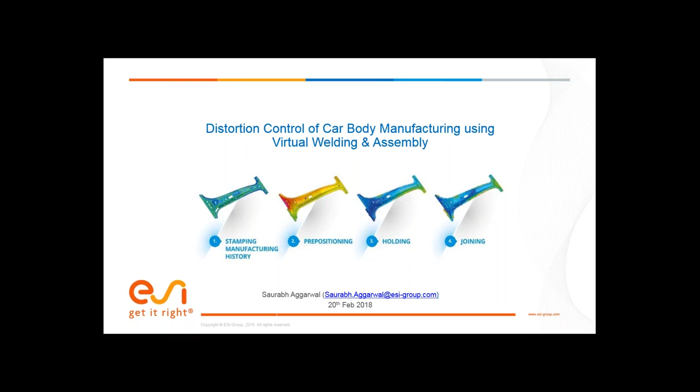So just to present you the brief outline, we will be talking very briefly about the key automotive trends and the challenges for the body shop, where the car body is manufactured by welding and assembly, and how we can accurately predict the distortions in the welded assemblies. But predicting the distortions is not the only objective; the objective is how to control the distortions, and we will demonstrate with a few industrial examples. And then at the end of the webinar, there will be a live demo to show you the workflow. So let's start with the automotive trends and key challenges for body shops.

So I hope you all will agree with what I am going to say, because these are the general trends. As you know, due to global warming, the automotive industry is forced to follow strict emission norms. To follow these emission norms, weight reduction and electrification are the key levers for achieving CO2 emission targets. And these are the main levers which automotive OEMs and tier suppliers are adopting. And along with the emission norms, the requirement of safety is also increasing day by day.

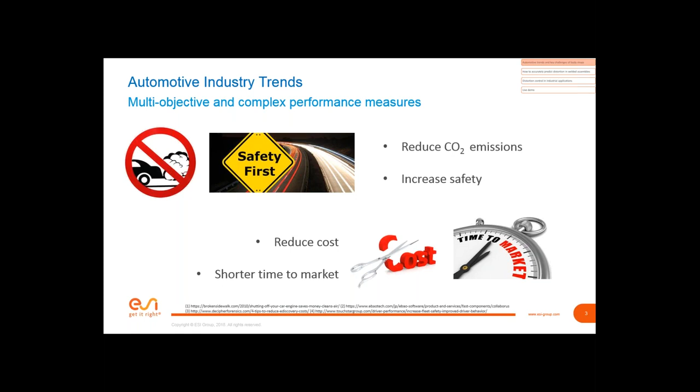So let's discuss a few challenges and the requirements for the automotive industry and how they can overcome these challenges. So we say back to the basics: maybe the vehicles in the future are electric or not, we still require basic parts such as wheels, seats, chassis and bodies. And especially, today's topic is car body manufacturing, so it's body in white.

So the design cycle of the car platform is reduced from several years to months. That means one needs to save on building physical assemblies and do only effective things, and also most efficiently. So we need to ensure successful upfront verification and validation to avoid costly downstream problems. That means at the design stage, we need to include the manufacturing effects or defects so that we avoid them or control them at the production site. So this is really one of the aims of the industry.

And as I mentioned, weight reduction is one of the levers for emission reduction. So advanced steels offer the best weight reduction to saving ratio for automotive parts, but often they possess more springback and less formability, which leads to their manufacturing challenges.

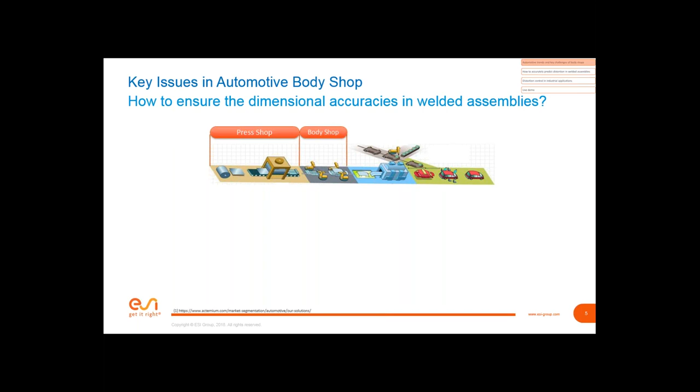So the end goal of any body shop engineer is to manufacture the stamped welded assemblies within the right tolerances to ensure dimensional accuracy. But often they encounter dimensional inaccuracies for two main reasons. One is the mechanical load effects of the assembly, another is the heat effects of the joining process.

And the body shop engineers have to deal with a lot of challenges, like multi-materials that don't have the same thermal and mechanical behavior. They have to deal with stamped components which do not fit the CAD nominal shape, and they have no control over the stamped shapes because they come directly from the press shop.

And they also have to deal with unexpected gaps between deformed components and parts. And, as we mentioned, the heat effects of welding because of thermal expansion and contraction during joining. So these are really the key day-to-day life of a body shop engineer.

So in order to avoid problems, the body shop engineers need to tweak the production process multiple times before the distortions and dimensional inaccuracies are within the tolerance, within the specifications.

So the main objectives for body shop engineers, maybe I'll point them out. They want to optimize the positioning and holding system as fast as possible in order to reach the requirements. Optimized weld positions and sequences.

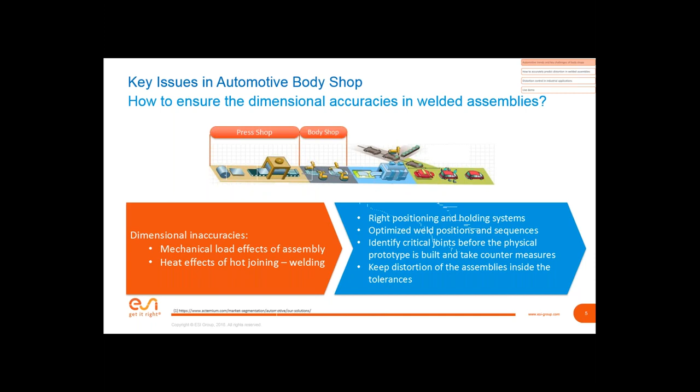But before we move on, just to show you a typical issue in the automotive body. You will agree that these issues are very difficult to predict at the design stage when no tools are built. So this is a prototype part, a cowl plenum assembly in body in white. As you can see here, the reference positioning system is planned during the design stage when there are no tools. But due to the stamped deformed parts, there are often interferences between the parts and the RPS system.

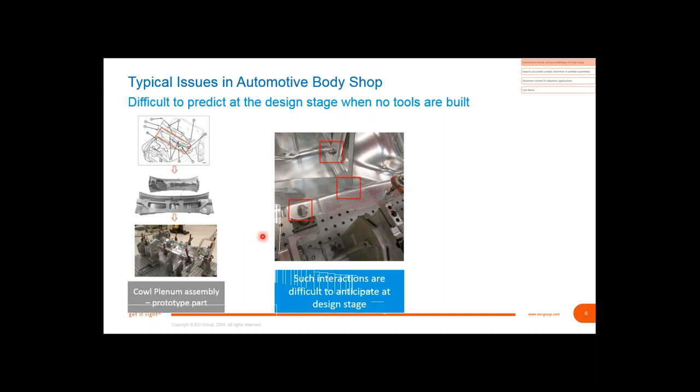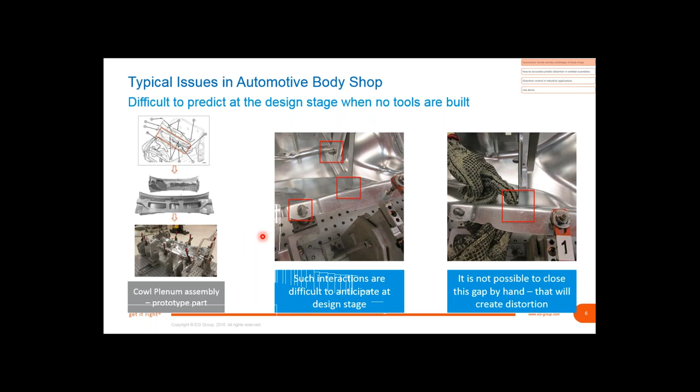So here in this image, you see that such interactions are difficult to anticipate at the design stage. That means body shop engineers have to take care to avoid these things. Moreover, during the assembly there are large gaps, and it's not possible to close such large gaps by hand. Closing such gaps in the body shop will then lead to distortions, which you will see in the coming slides later in the presentation.

So let's now talk about how we can accurately predict the distortion in welding assembly with the simulation software which we have, ESI virtual welding and assembly solution. So just to give you the overall view of the different steps which are taken, that's the main goal of this slide. To fulfill the objective of body shop engineers, we have developed a dedicated solution for distortion control for car body manufacturing.

It's an easy to use assembly simulation software that covers the complete manufacturing chain, starting from stamping, pre-positioning, holding or gap closing, and finally welding and joining, and to support performance analysis. It helps process engineers control and validate distortions and also product performance by taking into account the manufacturing effects right upfront at the design stage.

As you can see, during this complete chaining simulation, as the model changes, we need to transport key data from one simulation model to another, mapping results from stamping to pre-positioning to holding and finally to joining. To reduce this chained process, we have developed a dedicated tool which is already implemented in the software. In the next slides, we will explain a little bit more about the solution and its application.

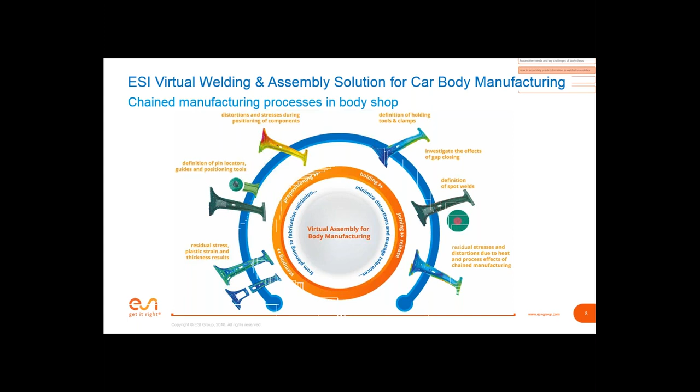Here we would like to present a complete end-to-end simulation chain for complete manufacturing for a B-pillar case, an important structural component of body in white. The stamping simulations were performed with the ESI solution PAM-STAMP, and the key results are plastic strains, stresses, and variable thickness.

To make it clear, there are two ways you can use the welding and assembly software. One, you can do the stamping simulation if there are no tools existing, or you can already take the deformed components coming from the press shop, and that can be your starting point. This will be presented later in the presentation.

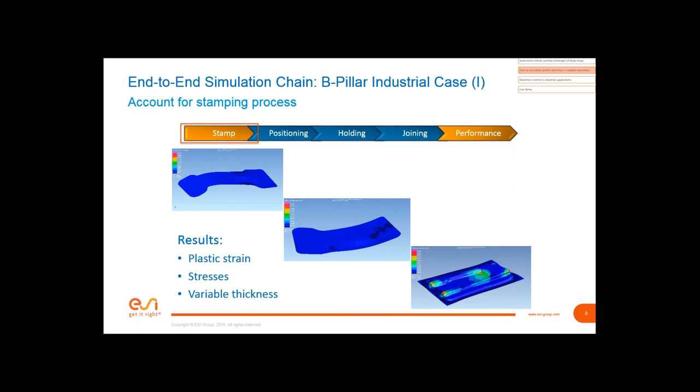In the pre-positioning or positioning stage, starting with the stamped deformed shapes, the parts are positioned in the RPS system, which is a reference point system. We have developed a complete workflow to help the end user set up the complete model by defining different locators, guides, positioning tools or support structure, and contact management to simulate the pre-positioning. The user also has options to choose from various predefined positioning tools, which you'll see a few of during the demo, so I won't show them here.

It's also possible to automatically import clamps and locator tools from user defined files, because most of the OEMs we work with have their own standardized way of storing or creating the reference point system, so automatic import of these RPS systems is possible. Here you can see in the RPS system, the parts fall under gravity, and we can simulate the displacement and residual stresses from just the positioning stage.

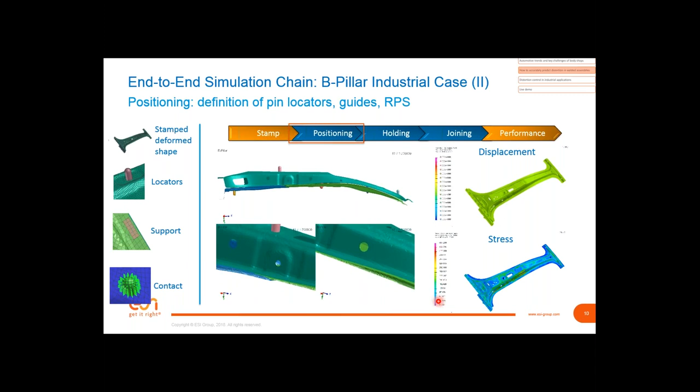Once the parts are positioned in the RPS system, the components are held together to reduce or close the gap. The user can define different holding and clamping tools, so the gaps are properly closed before any joining operation.

Based upon the sequence for various closing or clamping tools, you can define the sequence as per your requirement, and mostly the clamps are piloted by force and displacement criteria. Here again the user gets the possibility to simulate displacement and stresses. If you look closely, the different holding tools close the gap step by step, and we get the displacement and final stresses.

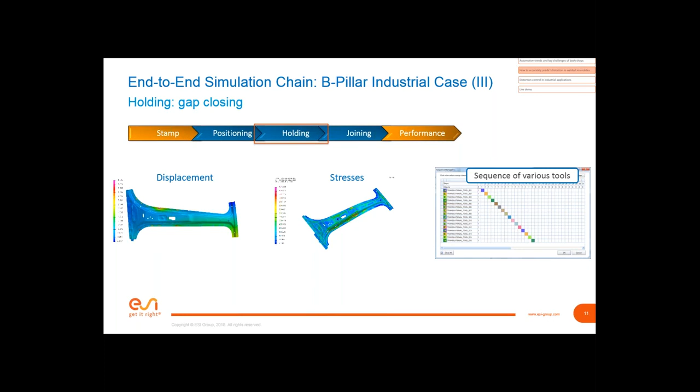Moving further, once the parts are positioned in the RPS and held, it's time to do the joining operation. The user can define the welding sequence. During this computation, the components are connected, and the user has access to the distortions and stresses resulting from the complete process. It's not only about the joining, it's the complete process, taking care of all manufacturing effects right from stamping, pre-positioning, holding, and joining. Here you also have the possibility to define the weld sequence based upon your requirements.

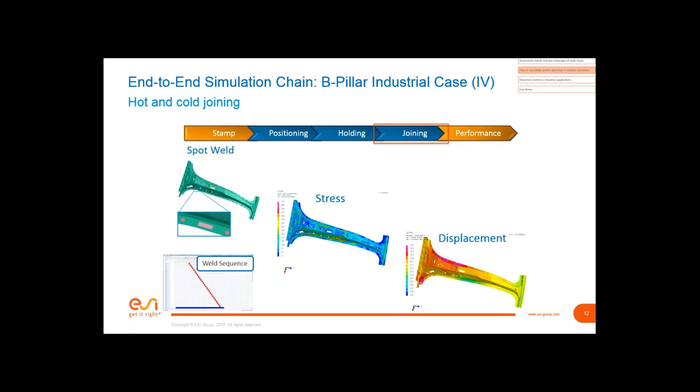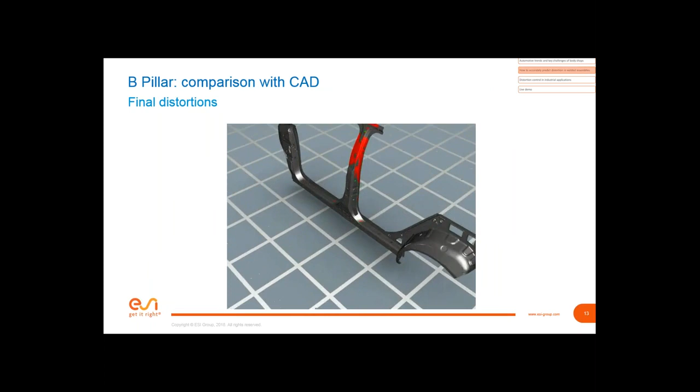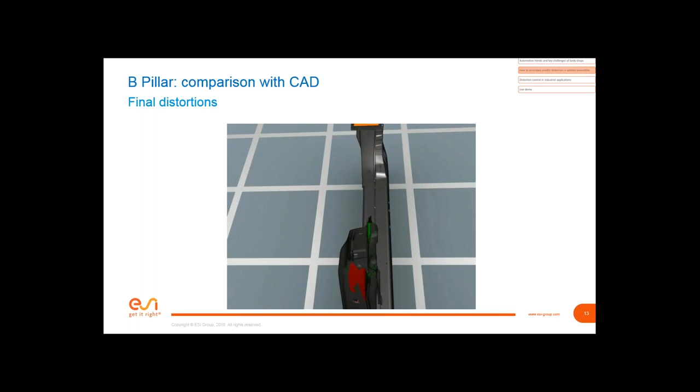Once you have all the information, you have the possibility to compare your final assembly with the nominal CAD and visualize the distortions in the ESI environment. Here you can see the red color, which shows the inaccuracies in the system, and based upon such visualizations, you can make corrective decisions.

Moving further, coming back to the problem we stated in the cowl plenum, where the real deformed stamp components were given to the body shop, the body shop has to find out what the issues are or which are the critical joints. You'll see this in the next slide.

In this particular case, the real deformed stamp components were scanned with white light scan as manufactured by the press shop, meaning the white light scans provide realistic gaps including the stamping manufacturing history.

So the body shop has to ensure the tolerances of the final assembly. That means from the STL file or the scanned file, we created the meshes, the working surfaces of the positioning system. They were extracted from the CAD files.

Here you can see the holding stage, it's a complete RPS system. What is very important to say is that the assembly simulation, or welding assembly simulation, is performed on the deformed geometry, not on the nominal CAD geometry. It's really the stamp deformed geometry, which is very important. So of course we have all these stages from stamping to pre-positioning, holding, joining, and releasing.

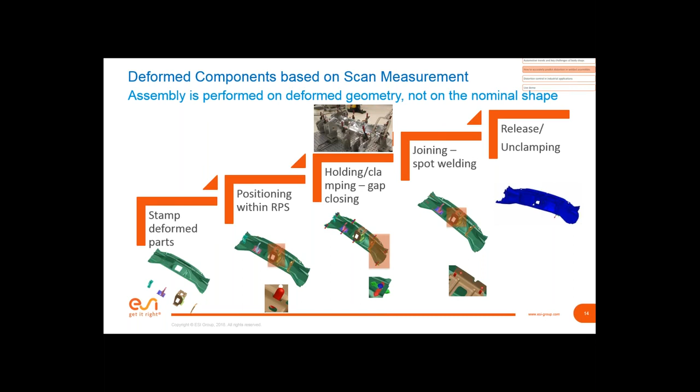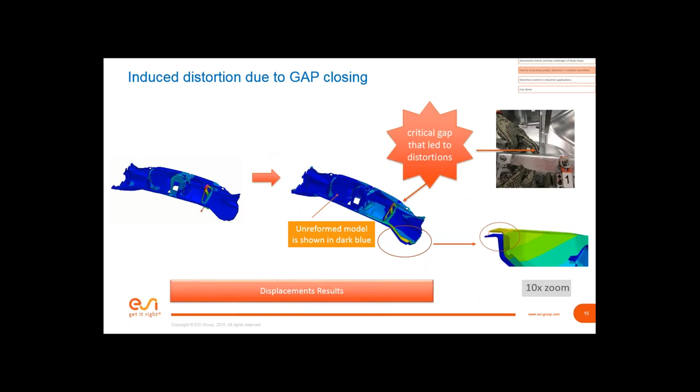Now, of course, it's very good to say that we can predict the distortions, but the final aim, as we mentioned before, is really to control these distortions so that the assemblies can fit within the required specified tolerances. In the coming slide, we will demonstrate a few applications, not going so much into detail, but just to give you the overview of how one can control distortions using virtual assembly and welding simulation.

So here we show one example of a typical door case. It's also a body-in-white structural part, where we will demonstrate how the pre-bending of the part is useful to reduce the final distortions.

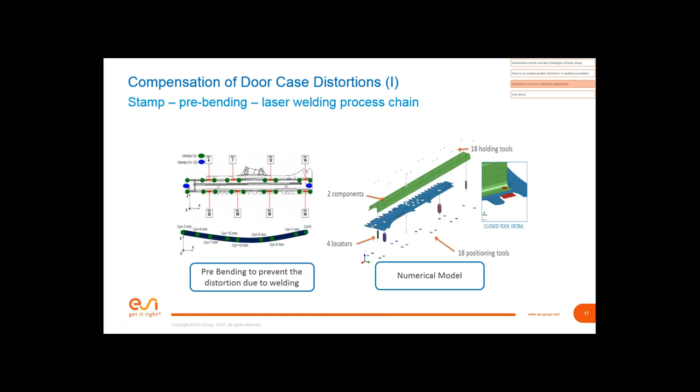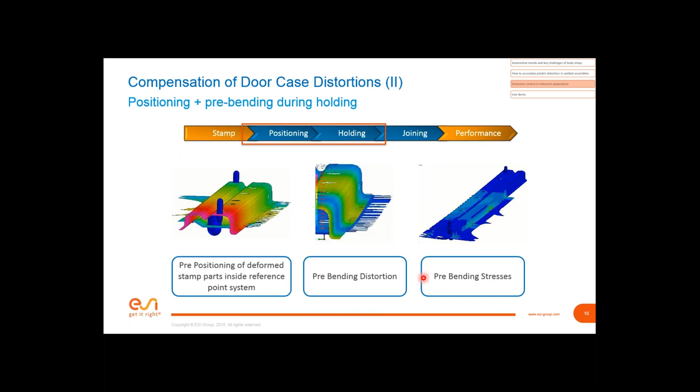Here again, we stamp the parts, and then during the holding stage, we pre-bend intentionally the part by 7 millimeters. If you see in this particular case, the part is pre-bent, and one can compute the pre-bending stresses to ensure that they are within the limit, and you will see what was the reason to pre-bend the part.

So it's mainly the compensation based upon the pre-bending. During the holding stage, as I mentioned, we pre-bend the part minus 7 mm, and due to the heat effects of the laser welding, the parts were distorted plus 6 mm. But as we can see, in the end, the final geometry was fitting the nominal geometry, more or less matching the original or required CAD.

So what is the message for this particular case? With such simulation tools, we are able to numerically know the amount of pre-deformation required in order to prevent the distortions due to stamping and welding processes, directly at the design stage, when no physical prototypes exist. So this is really one of the ways to compensate the geometry based upon pre-bending.

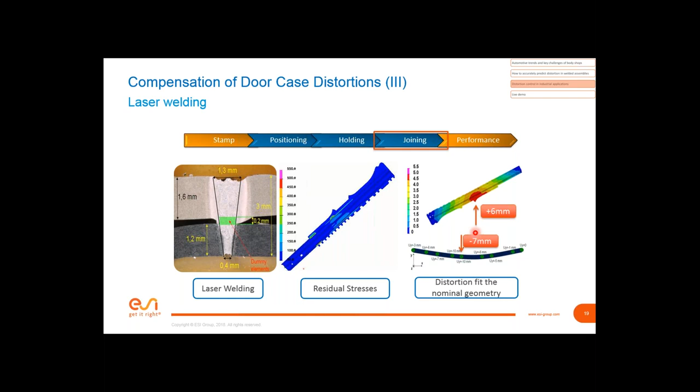Welding distortions can also be controlled by changing the weld sequence, and we have a dedicated tool for that, the weld sequence optimization. Here the user defines the original or initial weld sequence, and in the workflow, the user can also define constraints.

And due to the complexity of the problem, we have developed a genetic algorithm based optimization for minimizing the distortions by weld sequence optimization.

So finally, what we see is we get the weld sequence which will lead to minimum distortion. In this particular example, we were able to reduce distortion by 50% compared to the baseline, and 25% improvement compared to the worst case. So it's really a good tool for controlling distortions by optimizing the weld sequence.

So all these things you can do before doing any real assembly process. You have very good knowledge when you are doing the final or real prototyping, real production, so that you don't make any mistakes, and you are sure that the assembly will fit the required tolerances.

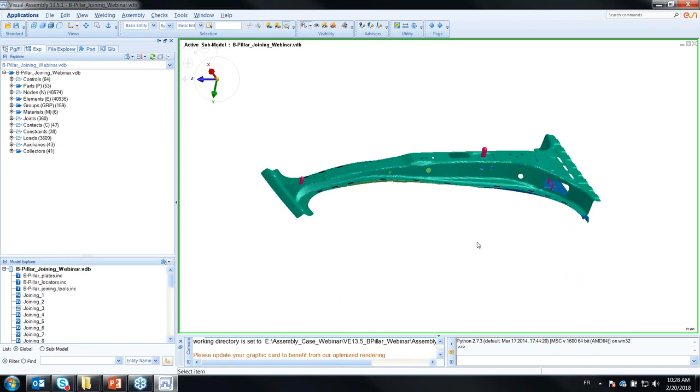So the goal of this demo is just to demonstrate the overall workflow. I will not go so much into detail about how to set up the model, but just show the overall steps which are required. So here is our visual environment, which is the key platform for all our software from ESI, and in this case particularly visual welding and assembly.

As you can imagine, the simulation is performed in 3 different stages: pre-positioning, holding, and joining. We have dedicated advisors to help you set up the complete model. I will not go into much detail about pre-positioning and holding. The most important thing is to show you the overall workflow, and I think the best way is to go into this advisor.

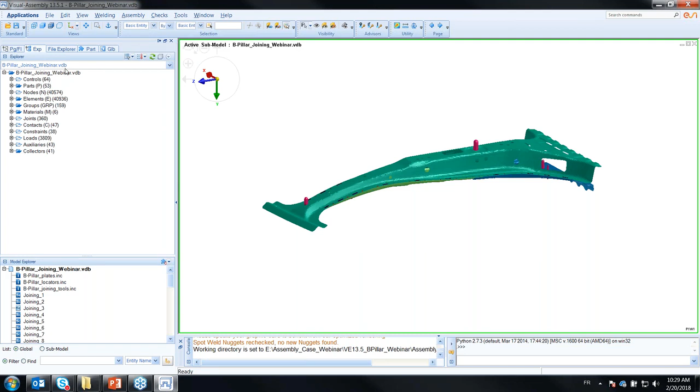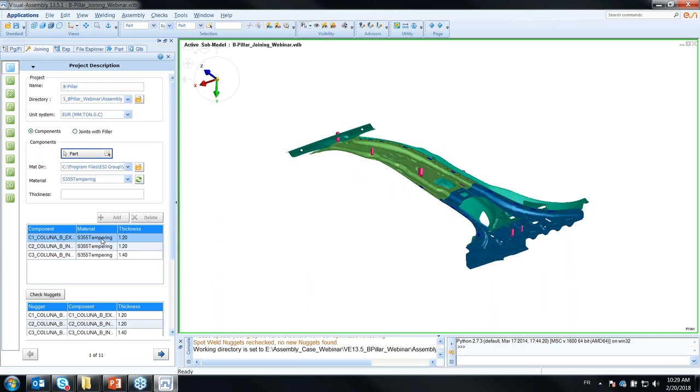I have to close this thing. Okay, so here we have 3 parts, or 3 components, to make the assembly: the external component and 2 internal components, and the material is tempered steel S355Tempering.

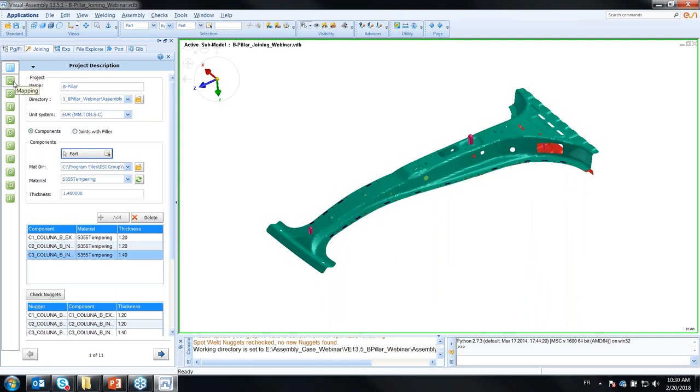So the first stage is to create the RPS system. So how do we create it? You have different locators and positioning tools.

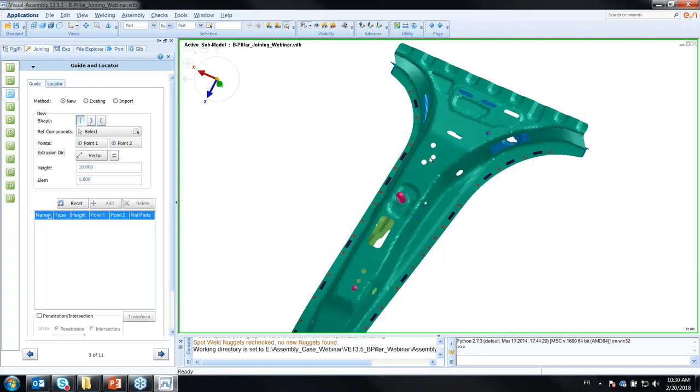I will just quickly create one simple locator to demonstrate that it's very easy to create. You select the reference component, you select the base point, center of, let's say, this particular one, and then you define the axis.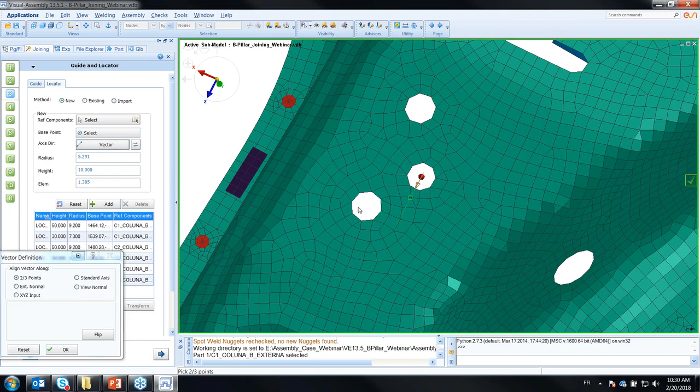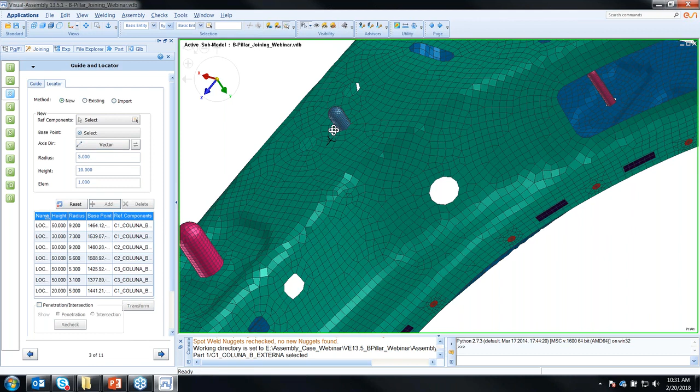Maybe in this particular case we can say standard y-axis, let's say 5, height is 20, element size 1.2. So it has created one locator. It's very easy to create such an RPS system.

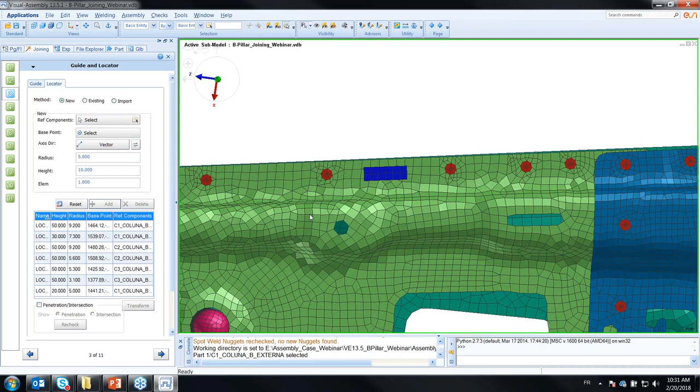As I also mentioned, there is a possibility for automatic import, mainly from Excel files, and the same applies to the positioning tool. You can create the positioning tools in the similar way as we have created the locators.

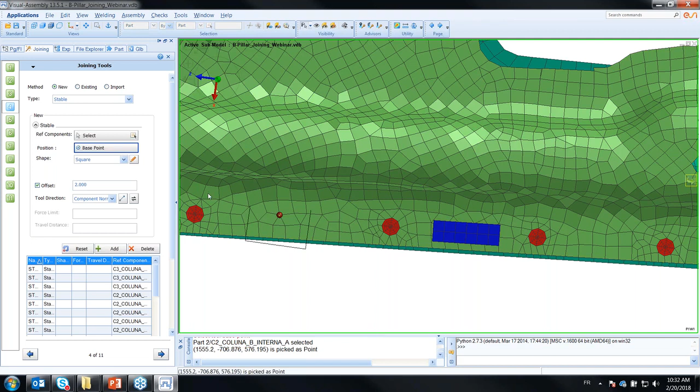So what is important to show is you have different shapes which you can choose, as you see, you have circle. Maybe I'll create a few of them just to demonstrate. Select this - here you can see the shapes, they are changing.

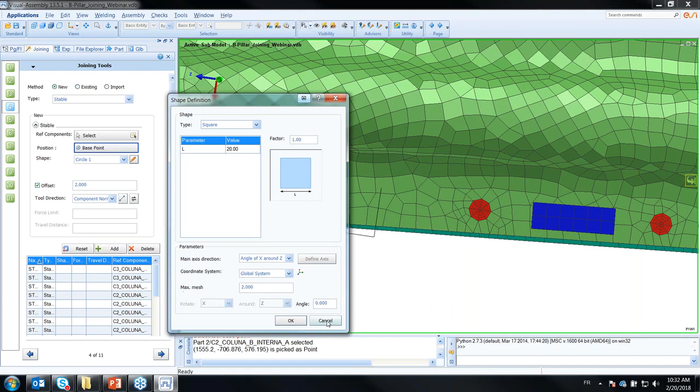And then you have different possibilities. As I mentioned, you have circle, rectangle, square. So based upon your requirements, you can create different positioning tools and also different holding tools.

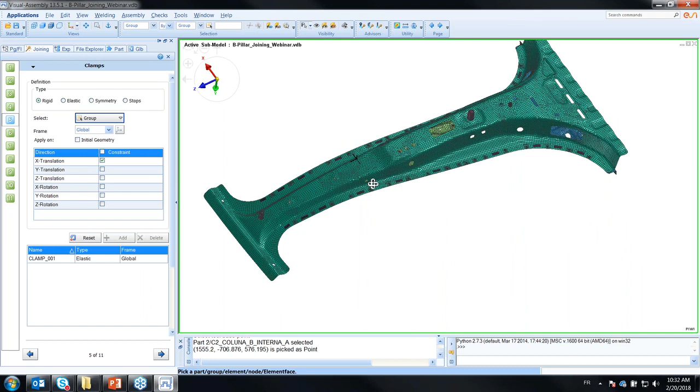So as in this particular example, we have created many positioning tools. And then you can define the clamps. Here we have the possibility - we have defined the elastic clamps.

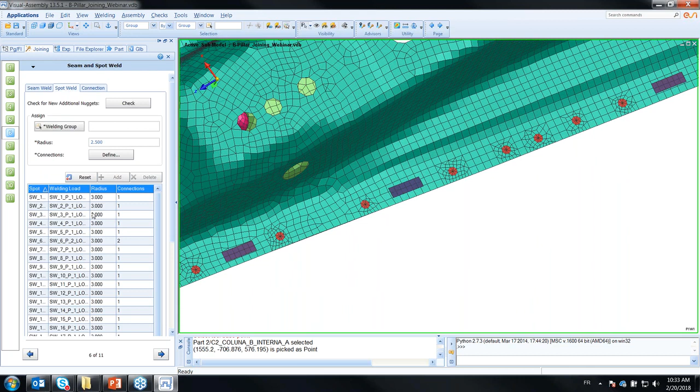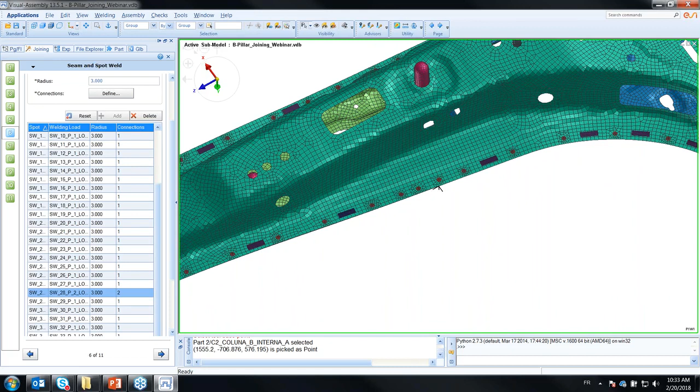And then once the holding and positioning tools are defined, we define the spot welds. Here you have the possibility to define all the spot welds. Depending upon the configuration, there will be some spot welds which are associated with the three parts, so they have two different connections. You can see all the spot welds which have been created for this particular case.

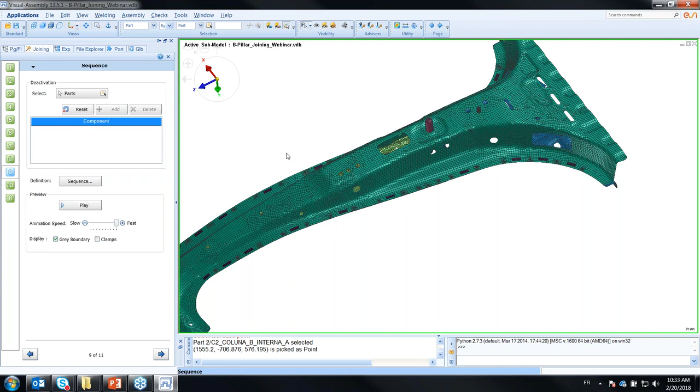Force and pressure we don't use in this particular case. And then we have the gravity definition. So for pre-positioning and holding, we do define the gravity, and for the joining, we disable this option.

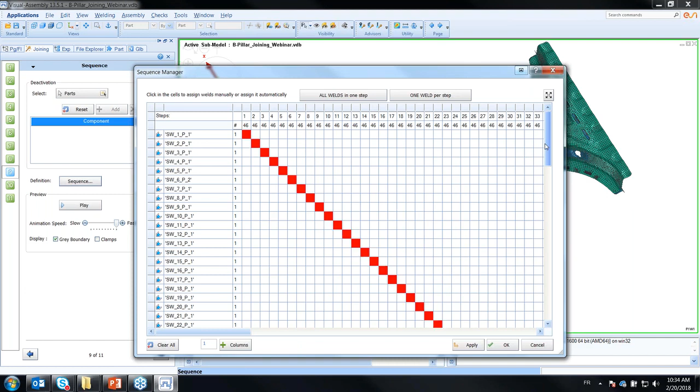What is important is, before running the simulation, you can see the complete sequence. So here, what we see is these spot welds - they are defined one weld per step, and accordingly all the positioning tools are activated and released slowly.

Once the spot welds are released, you can see - and what is important, maybe I'll make it slow so that you can see - put the clamps as well.

So here you see the complete sequence of all the positioning tools, spot welds, and this is required before any simulation, meaning you can ensure that your model setup is correct.

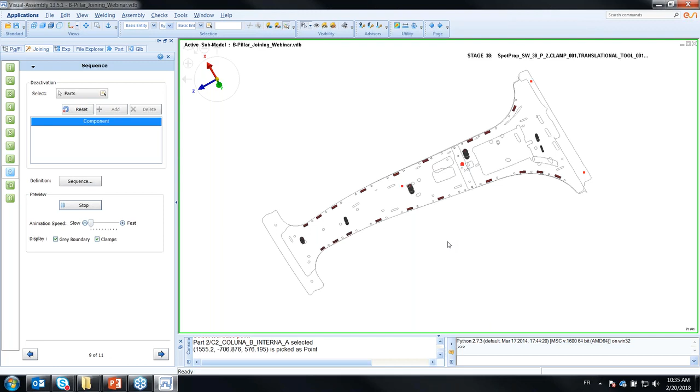And when we will see also, yes - after the spot welds, there is release of the positioning tools and the clamping.

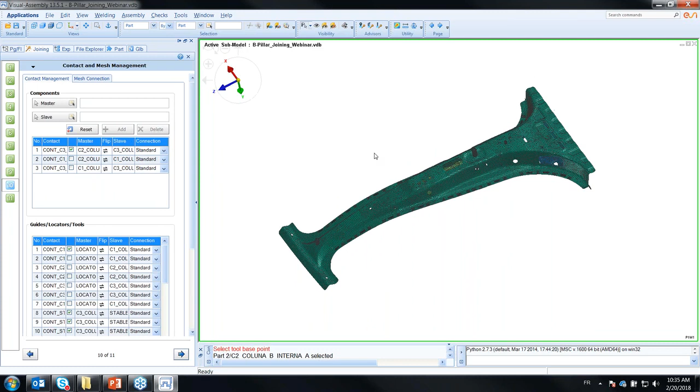Another important point before launching the simulation is the contact management. So for each connection, we automatically define the master and the slave. And what is important to note is that the arrows should always be from master to slave direction.

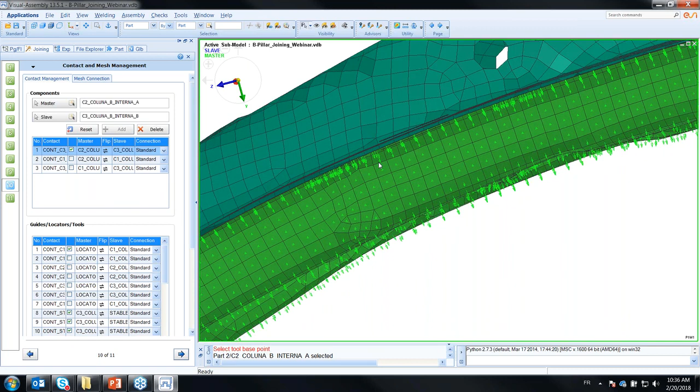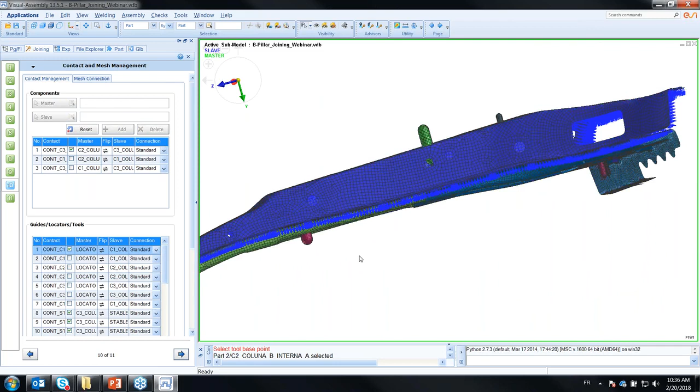So if we see in this particular direction, the master arrows are towards slave, and slave arrows are towards master. This is an important requirement for each connection. These things are automatically done in the software, but you just need to ensure that the directions of the arrows are correct.

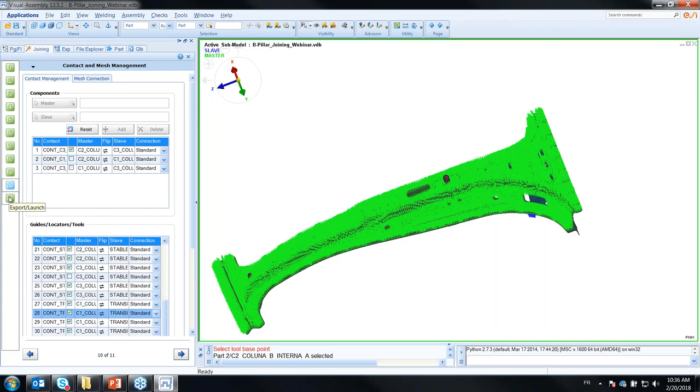And once you have created the complete model, you can run the simulation, and thanks to our DMP solver, you can run the simulation on multiple processors.

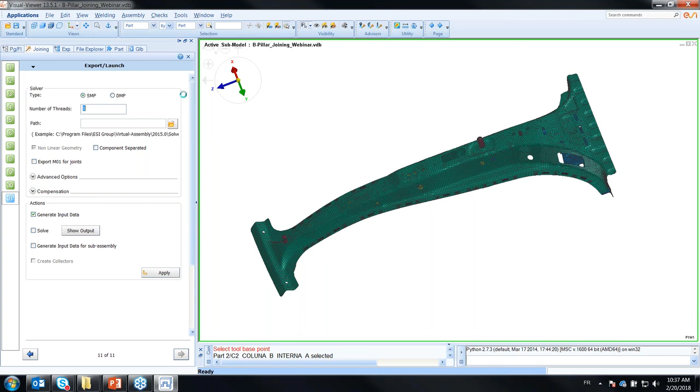Okay, so maybe I will just show you a few results. So then we shift to our visual viewer environment to see the results. I just open the file.

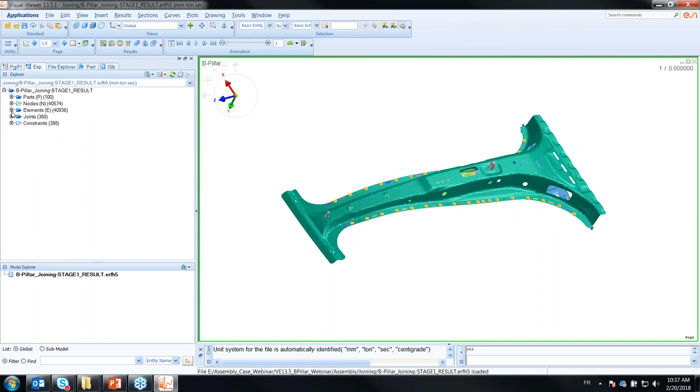So here we load the result file, and within some hours you get the complete results from the pre-positioning, clamping, and joining simulation. For this particular case, for 3 different stages, it took only 2 hours. So we just see first the displacements.

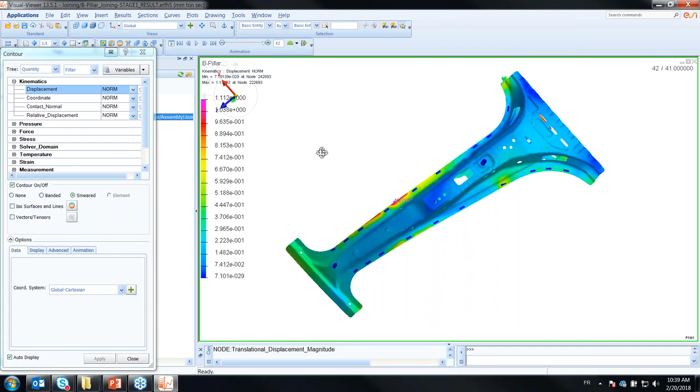So as you can see, with each spot weld, the gaps were closed, so there were distortions according to that. And in the end, in the last stage, you see the maximum distortion at this point. It's 1.1 millimeter. And similarly, what is important is you can also see the von Mises stresses.

So I think this can be interesting, because you will also see how the stresses are changing based upon the spot welds as it's welded. So these stresses are in the range of 500 MPa. And then after all these spot welds, you have the unclamping of the assembly.

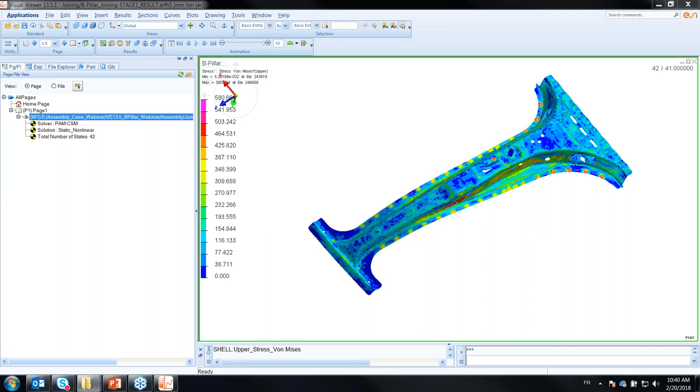And one more thing which you can check is the difference between your first original geometry and the final. Just open the file. Let's say I make it pink or not pink. And then you can see the object distance. So it's like a point to point difference between the initial geometry and the final geometry. Sorry, I need to select the parts as well.

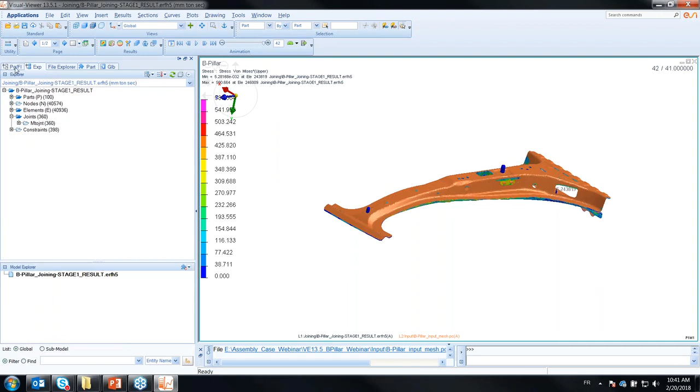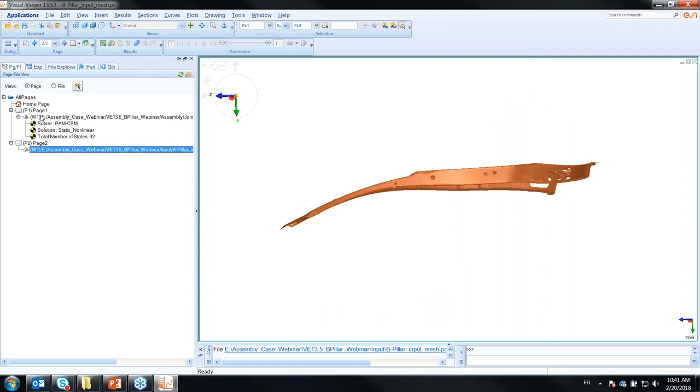Maybe to make it more clear, let's just focus on the external part. Okay. So I'm just hiding the parts, so that we just focus on the... so here you can see the difference between two parts, but let's calculate the object distance as well. So part,

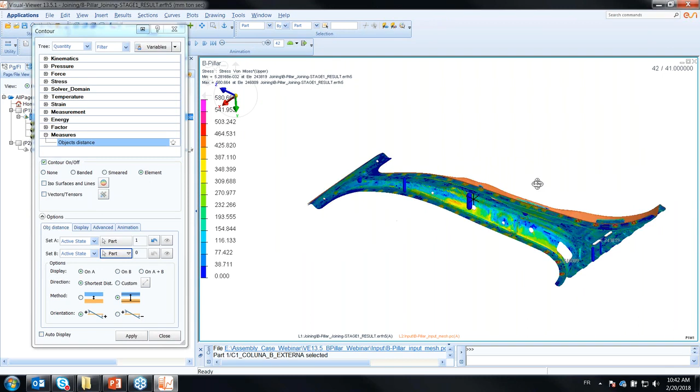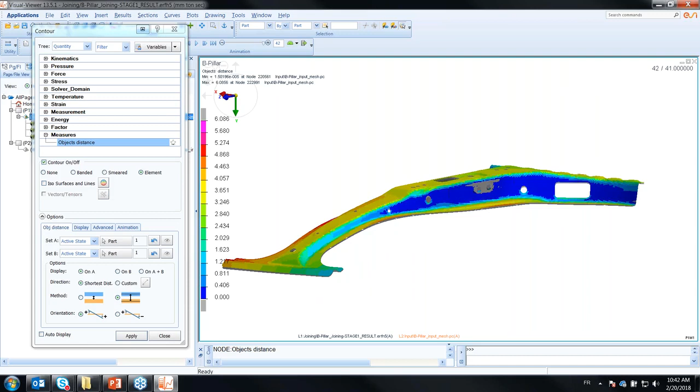So what this result shows is the difference, as I mentioned, from each point, a typical distance between two different geometries, and it's calculated based upon the nodes on the meshes.

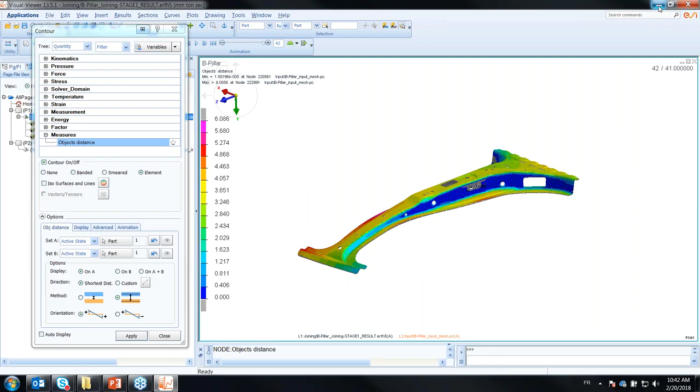we are able to numerically predict the amount of pre-deformations which are required in order to prevent the distortions due to stamping and welding process directly at the design stage, when no tools and no physical prototypes exist. And you have different ways, depending upon your requirement, to control the distortions. It can be by targeting a new geometry after the stamping, or you can do the weld sequence optimization when the parts are already made. So it's really case to case.